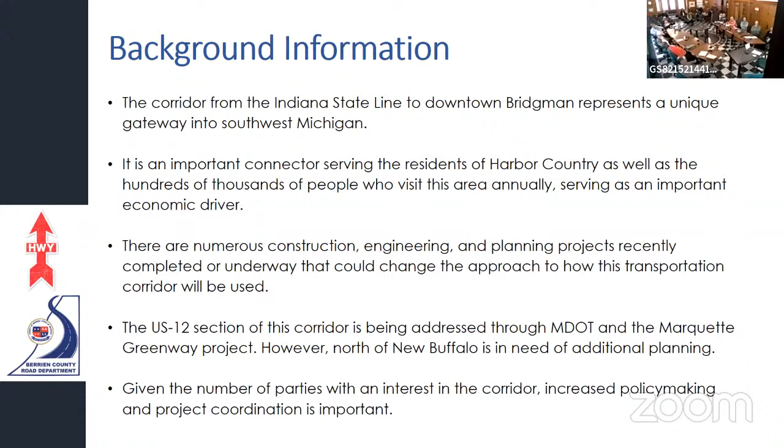This is a roll-up of the construction that has happened along this corridor since 2018. Ultimately, the takeaway is that 7.73 miles has been completed so far.

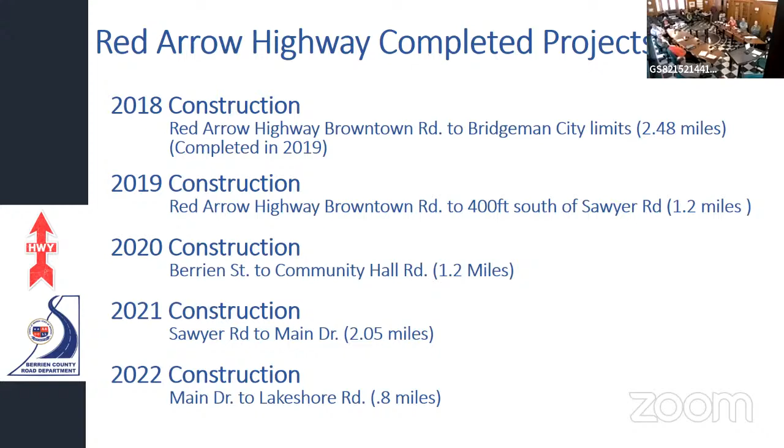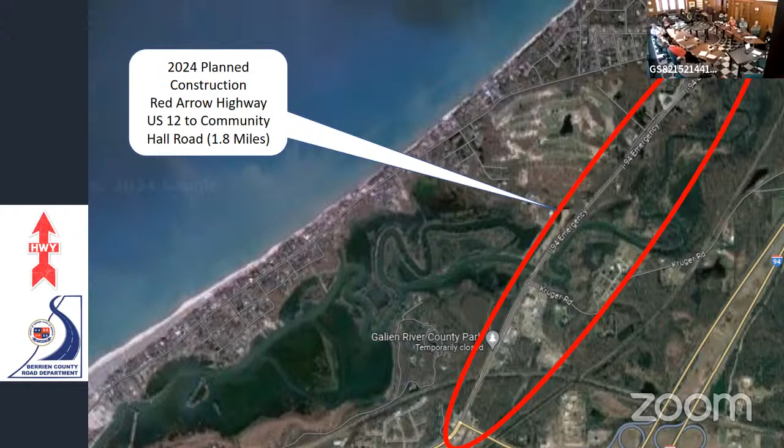Moving into this year's planned construction, US 12 to Community Hall is on the project list for this year, as well as Berrien Street to Lakeshore Road. However, we are still waiting for the approval of a TAP grant, which is linked to this project.

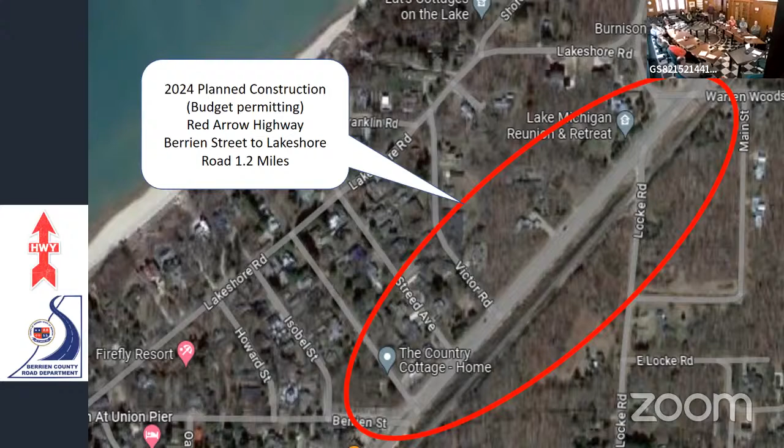Part of this construction provided us an opportunity. During the construction, the data showed us that it was appropriate to do lane configurations, reconfigurations on Red Arrow Highway. There are a number of safety benefits that come with conducting lane reconfigurations—otherwise the slang term is road diets.

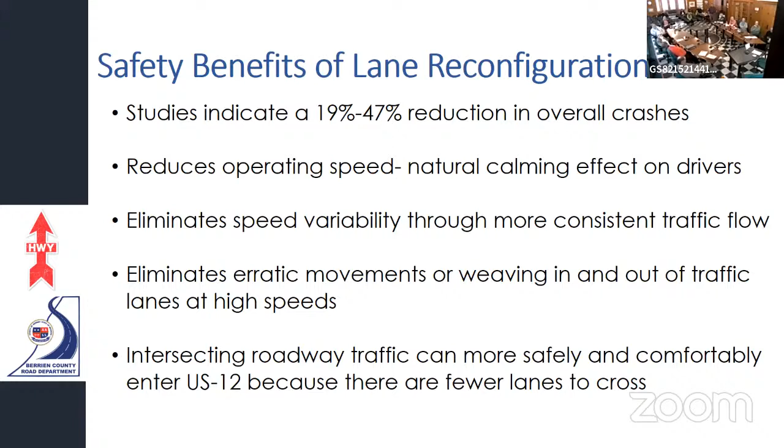Primarily they're naturally traffic calming. They provide motorists safer turning movements, and ultimately they reduce rear end collisions and sideswipe collisions for drivers.

This next slide will illustrate what I'm talking about with regard to conflict points. As you can see in the figure, there are 6 possible conflict points on a 4-lane undivided highway, described by the white circles. With a lane reconfiguration, or a 3-lane with a center turn lane, that reduces the number of conflict points in half, to 3.

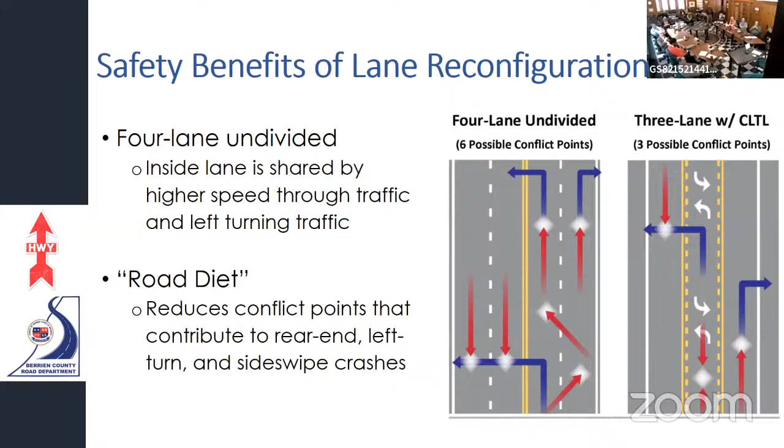In addition to reducing conflict points, it also improves safety by improving driver sight lines. As you can see in the illustration, when you have a 4-lane undivided highway, some cars in the inner lanes can mask or conceal cars traveling in the outer lane. Improving these sight lines greatly benefits safety.

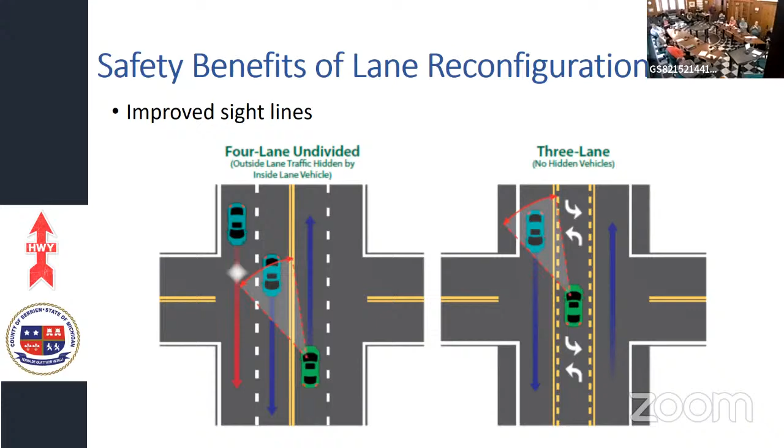Some of the concerns regarding lane configurations are about how much traffic a reduced number of lanes can handle. For example, between I-94 and Red Arrow Highway, currently there are 10 lanes of traffic, servicing approximately 75,000 cars per day. By comparison, using an example everyone's probably familiar with, the Dan Ryan in Chicago is comprised of 16 lanes and carries 300,000 cars per day.

So the Dan Ryan is comprised of 16 lanes and carries 300,000 cars per day. We have a lot less traffic, so ultimately the lane reconfiguration is able to handle our capacity.

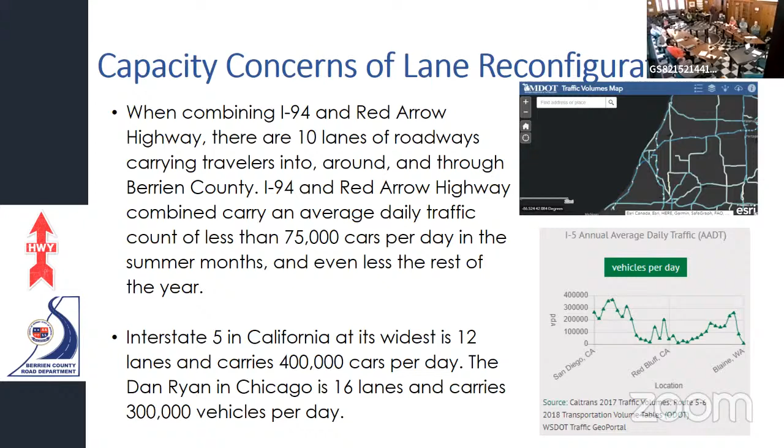In addition, there are times when I-94 has closures, but they're not as common as you may think. Total closures between 2015 and 2018, there were only 4. Closures that occurred with more than 1 lane are a little more prevalent, but those double closures still allow for the traffic to keep flowing.

With a bit more information on the closures and the reasons why: 11 of those closures were due to snowy and icy conditions. Only 2 of those closures happened in the summer, which is during our highest usage of the Red Arrow Highway, and at no time were both directions of the interstate closed at the same time. Ultimately, the average closure time was about 2 hours and 47 minutes.

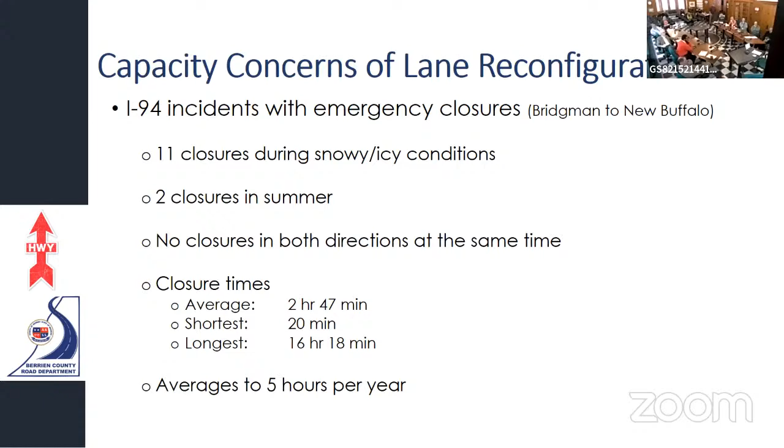So as you can see, they're not quite as prevalent as you may think. Lane reconfigurations also allowed for the implementation of a trail system. This trail system was discussed, talked about, and supported by two resolutions from the Board of Commissioners. I won't rattle off the numbers because I don't think anybody can refer to them other than by looking them up on the internet. Ultimately, the biggest piece of this is that people using the trail can feel safer and more comfortable with more space between fast moving traffic and themselves utilizing the trail.

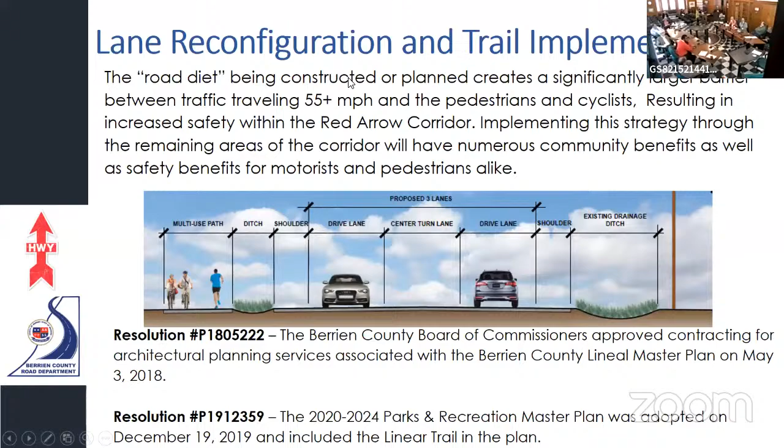And with that, I will transition to Marcy Hamilton, who will take you through a presentation on the trail, the linear park along Red Arrow. Actually, I'll let Annette do that. Thank you.

Did not bring yours up, so I'm going to do that. It was a PowerPoint, right? Yeah. Oh, right here, I think it's this one. This one. So Brian, while we're waiting for them to get up, if there's any questions, I see there's some here from the commissioners.

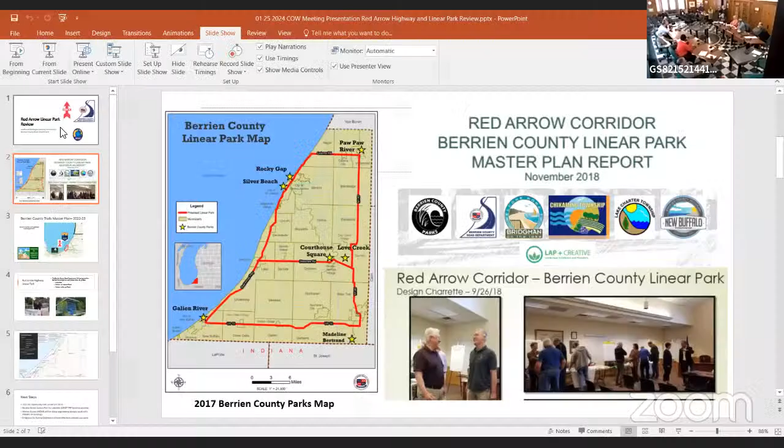The question was asked by Commissioner Yarborough. There was a temporary lane diet implemented in a partnership between New Buffalo Township and MDOT. MDOT implemented it just prior to the start of the summer season, and as a result there was very little communication and very little explanation of what was happening. New Buffalo Township requested that the temporary lane diet be removed. So that would have been, I think, the summer of 2020. Does that sound right? Yeah, yeah.

And it was up and running for a very short time. Thank you, dear. You're welcome. Sorry about that.

All right, so we thought we'd go ahead and give you a little update on the trail part of the Red Arrow project. This is the map from your county recreation plan that the resolution Mark mentioned adopted. This map and that plan is trying to connect all the county parks with a linear park system or pathway system.

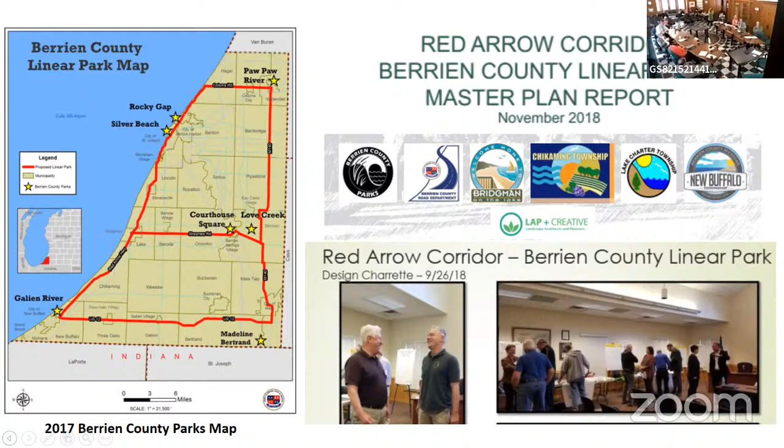A lot of this started way back in 2018, where the county hired LAP to do a study along Red Arrow Highway, the corridor, and the linear park. We got a lot of community feedback through that process, and the report given to the county supported what Mark talked about, the lane reconfiguration and the trail. There was a lot of support for that trail. It was a dangerous situation before that, with people walking on the road with very high speeds, people biking and walking on Red Arrow Highway, because it's a very popular spot.

So we've been working in tandem with the road department to implement the trail piece of the project by helping to write the grants to MDOT and to other funders like the Pokagon Fund, with the Friends of Berrien County Trails and the Southwest Michigan Planning Commission. We're doing all the grant writing for the trails. And obviously in the Berrien County Trails Master Plan, which we talked about last time, this whole project is supported in that, just recent plan.

As you can see, the red arrow, we call it kind of that red arrow gateway, because it is the gateway into Michigan. With the completion of the Marquette Greenway that'll connect us to Chicago, construction starts on that this March. And then going up north to South Haven, you connect to the Kal-Haven Trail, which is going right now all the way past Battle Creek. There's plans to take it all the way to Port Huron. It's called the Great Lake to Lake Trail.

And then there's work to bring that trail all the way up the coastline, all the way up to Traverse City. Right now it's US Bike Route 35. There are a lot of pieces of that trail in place up in South Haven, Holland, and Saugatuck, and on up the coastline—several segments of this trail completed. So we really are in a special place here in Berrien County, being the gateway to Michigan for this system. It's pretty exciting.

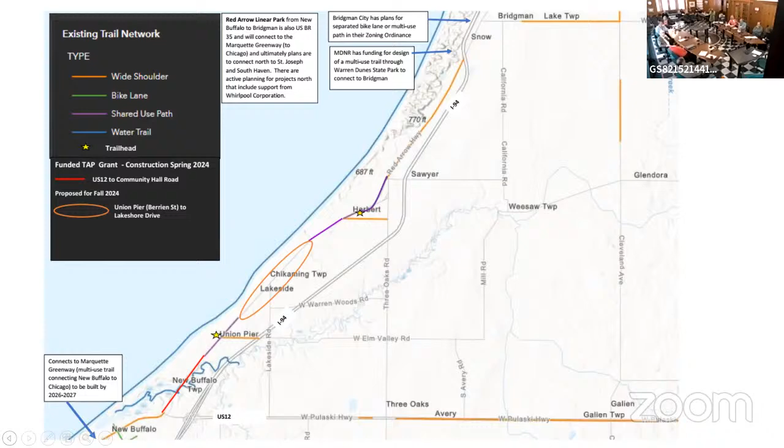And Bridgman is talking about extending that trail through town. It's in their plans locally too. So yeah, I pretty much talked about that. That's what's happening next. I think that's all we have for you guys on the Red Arrow piece, if there's any questions.

Are there any other questions for Marcy, or any that you thought of for Mark?

Lake Township and Bridgman's plan is to run the bike trail through the state park, not along the highway side, all the way into Bridgman—well, not all the way into Bridgman. It'll only be from where the state park starts, at Browntown Road.

And that's where it'll go off into the state park, up to Floral Lane—that's the farthest we can get on state land. Past that, there's no way to get on state land into the city, so we need to come back out onto Red Arrow Highway at that point.

So I know Lake Township doesn't favor the 4 lanes to 3. I know Bridgman does. So is that already in the plans, that Bridgman is going to 3 lanes? I mean, how is that going to work? You're gonna go from 4 to 3 and then out again?

So as we come up out of Sawyer, right now we're in Sawyer with 3 lanes. The Sawyer intersection remains the same for capacity reasons at that signal, unless we get funding to do a roundabout. But without that, that won't happen—so that will stay the same.

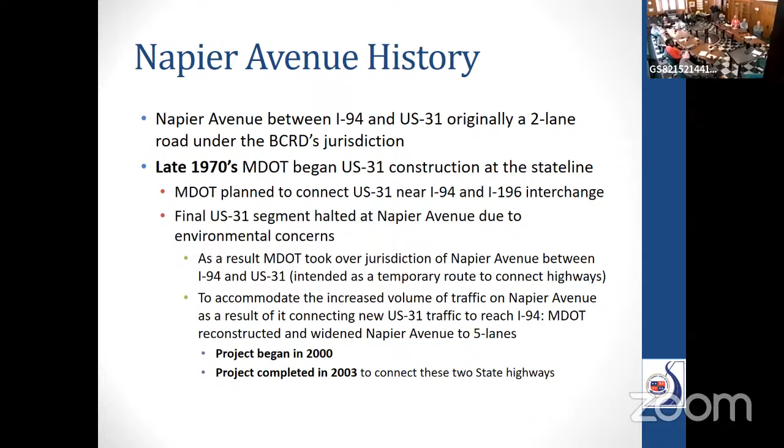Fall of 2020, MDOT began construction of US 31 to connect to I-94. The project was completed in 2022. The temporary route of Napier Avenue connecting US 31 and I-94 was no longer necessary to be under state jurisdiction. In November 2023, MDOT went through the proper process to transfer jurisdiction back to the road department. Due to the traffic pattern and volume change of Napier Avenue, a traffic study was requested by the road department to use for properly designing Napier Avenue for all users.

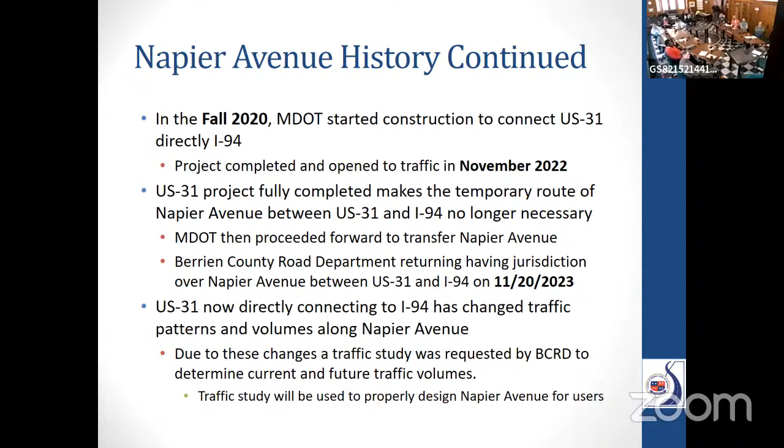Just an overview of the area we're talking about again, from I-94 to the US 31 bypass. Like I said before, it goes to Blue Creek on the east end and Crystal Avenue on the west end. This will be the last section of Napier to be constructed and redone, from basically the river all the way out to the county line.

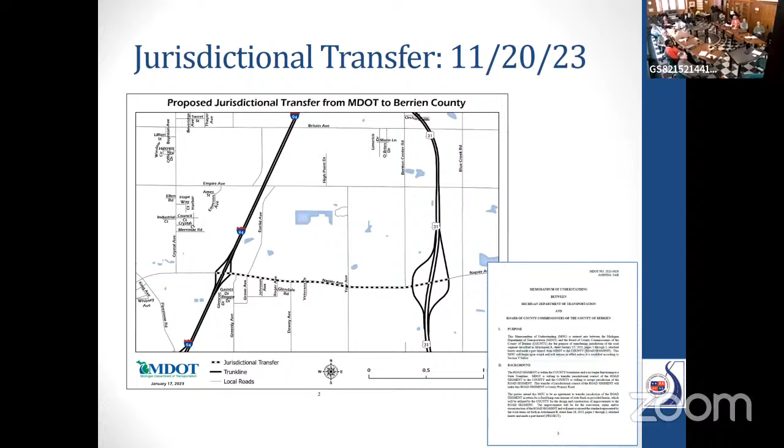Yes, ma'am. Crystal Avenue is all the way to your left of I-94. I don't know if I have the... Okay, yep, so it's all the way to your left on that screen.

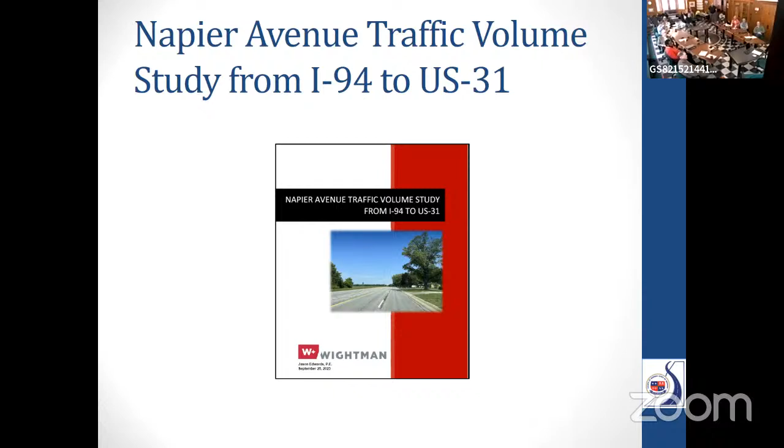This is just a traffic study cover that was performed by Wightman back in September, early October, using traffic data that we collected during the summer. That's just a screenshot of what it looks like.

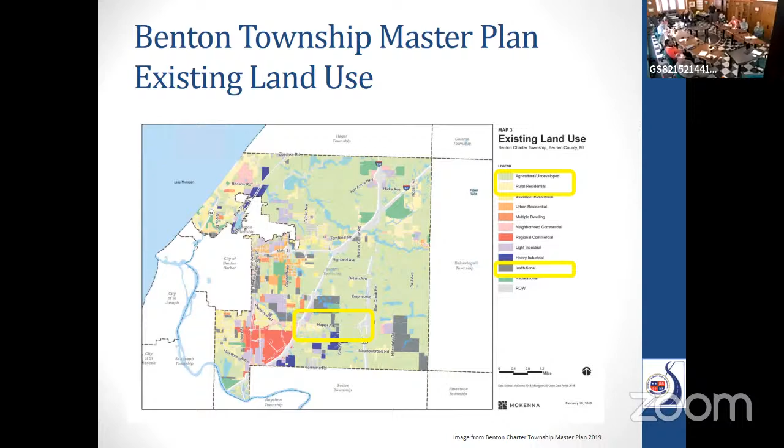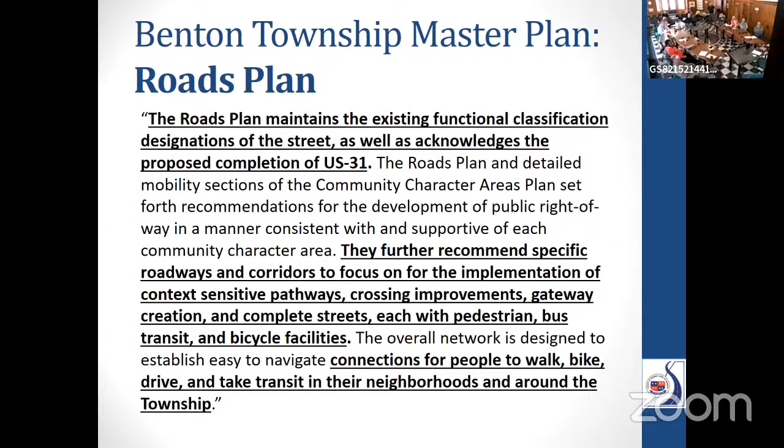The next slide brings it down into further discussion of mobility and public feedback, which emphasizes support for rural complete streets, non-motorized connections, and leaving land vacant for agricultural uses. Within their master plan, they have a specific section on road plans. Even though this plan came out in 2019, the road plan portion acknowledged anticipation of completion of US 31. The overall network is designed to help people walk, bike, drive, and take transit in their neighborhoods and around the township. This is pulled directly from their master plan available online.

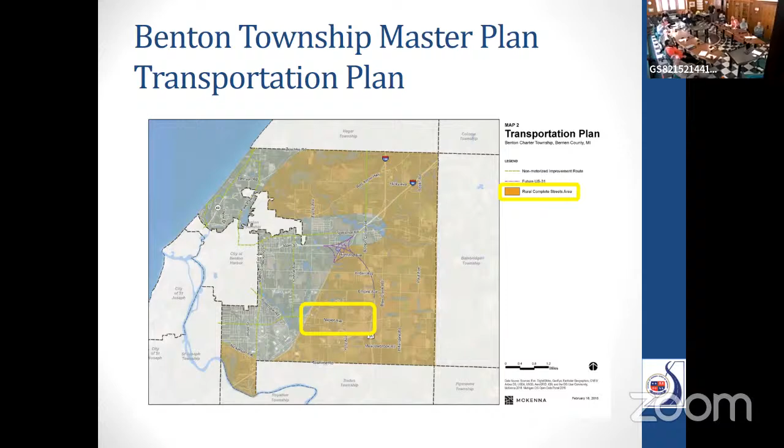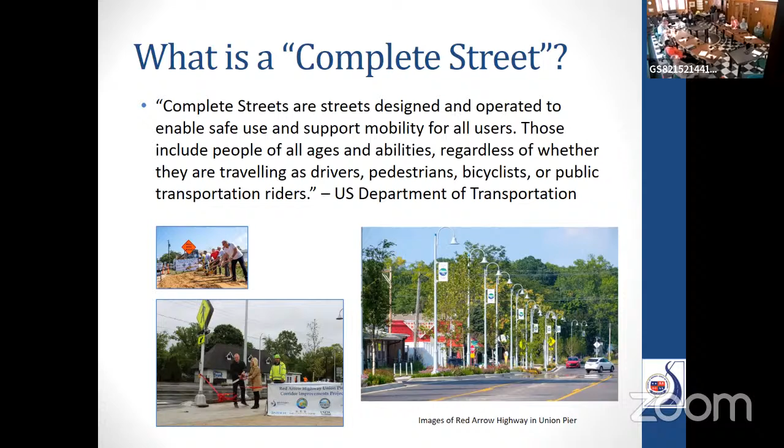This is another highlighted area. Again, our corridor is in the highlighted yellow. This defines this area as a rural complete street. What is a rural complete street? Examples are Union Pier and Red Arrow. That is a massive complete street, we call it. Your pedestrians, your motorized vehicles, your bikes, everything can use it. That's what we cite as a complete street. The U.S. Department of Transportation cites complete streets as streets designed and operated to enable safe use and support mobility for all users, including people of all ages and abilities, regardless of whether they are traveling as drivers, pedestrians, bicyclists, or public transit riders. That's a quick definition of what a complete street actually is.

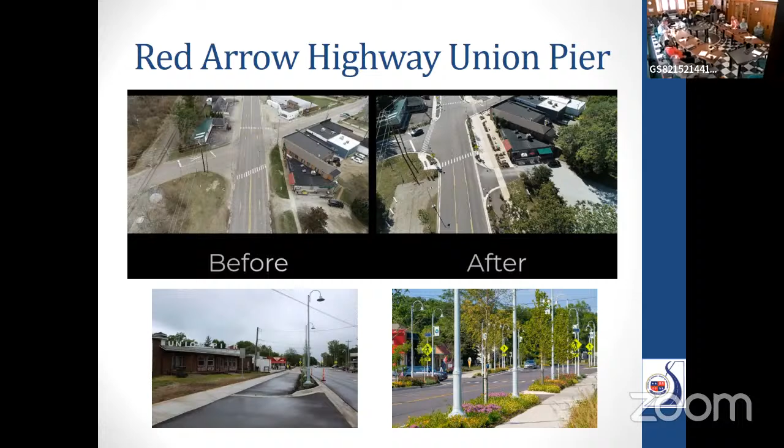This is a picture of Red Arrow Highway in Union Pier, showing on the left the before: 4 lanes with very minimal non-motorized features. On the right, the after: the same picture showing the large sidewalk and the non-motorized trail. The bottom shows some ideal pictures of what it actually looks like down there.

Yes, ma'am. So we performed a study on that this year. We are seeing an 80% reduction in rear end crashes, so a significant increase in safety there. We're seeing about a 67% decrease in pedestrian versus car, which is astronomical. The only thing that was a little interesting to us, we saw a slight, probably 4% increase in sideswipe. The only thing we can relate that to is those incidents are coming from Miami and Napier, and Colfax and Napier, where they're rushing to get in. So that was something we looked at as far as queue lengths when going into our design, how long we're giving them to transition over. That's something we're taking into consideration as we move into more road diets, as far as, all right, we've learned from our first one, the busiest section, how can we implement to be better?

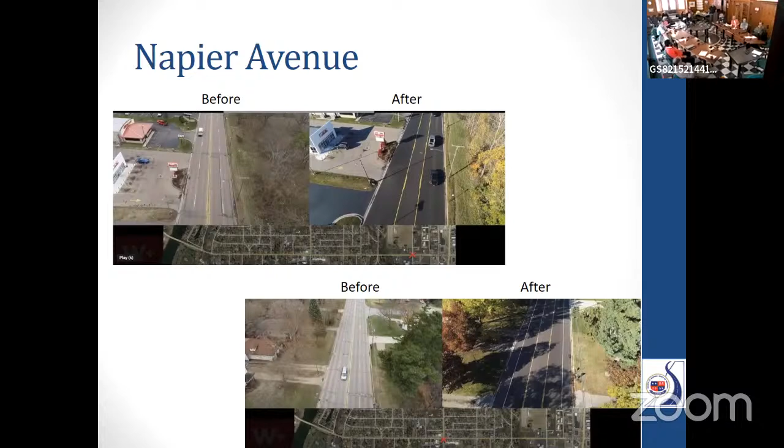You saw the sidewalk project happen in St. Joe this year. St. Joe took ownership of that sidewalk, and they're doing a phenomenal job clearing it. It's helped even more. We are having that issue of people wanting to put landscaping out between the sidewalk and the road. We have a very tight right of way there, we only own probably about 3 feet behind that curb. So it's kind of a back and forth game, but luckily that curb and gutter is there to allow us more flexibility in what we allow. Also we see people on the sidewalks using that extra width for whatever was intended, or parking there. So that's what we've watched. We have taken care of that several times now. The township has put that in place. I think we're seeing less and less of it.

So, right, you've got 2 different designs there. Obviously, the red arrow is designed to handle increased traffic, we're going to keep going, so it's not a long, drawn-out situation because we know in the future we're going to increase it. Napier is kind of stuck in there.

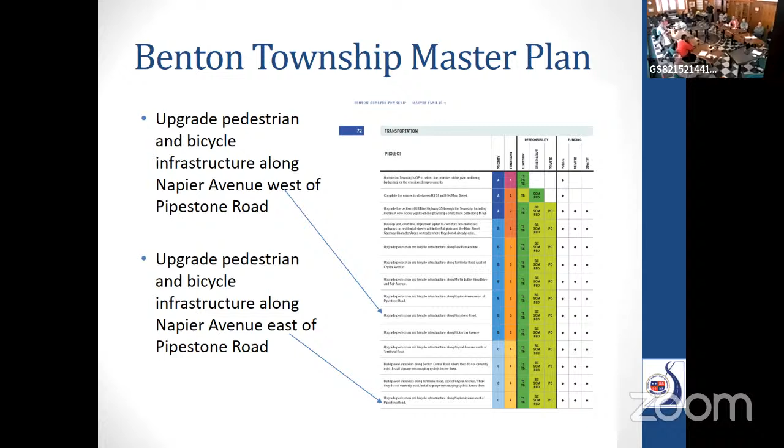Next, we're going to go through these conceptual drawings of Napier really quick. This is based on survey and design, then we make it artsy so the public can understand and see exactly what we're doing, but it is based off actual design. So we'll take just a little bit.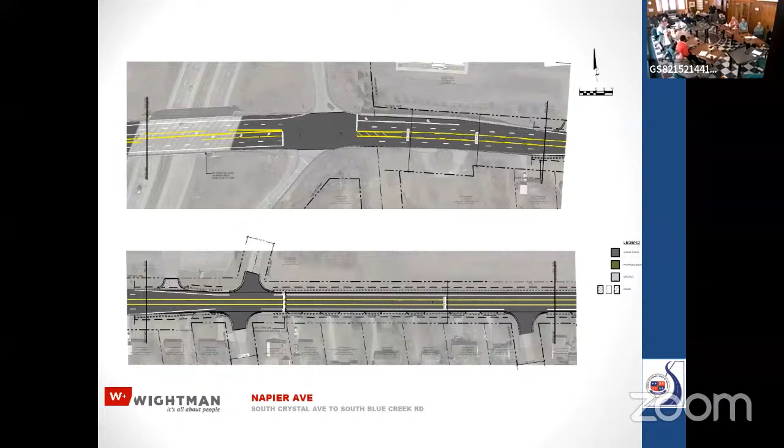Keep moving east, we get to the east side of I-94 as you approach the health department at the top—you're still looking at the same configuration. Now as you move to the bottom, you can see as we approach Euclid and the entrance to the health department is where the transition starts. This is transitioning down to two 11-foot lanes, one lane in each direction, with a center turn lane that's 12 feet wide. Each shoulder outside of that white line is 6 feet, each one. So this allows plenty of room for any type of pedestrian.

Now the difference here is what we are trying our hardest to achieve is removing the existing curb and gutter. There's existing curb and gutter out there now with drainage structures to handle all the water flow. There are water flow issues out there with the county drain, low spots in front of the old VFW that hold water on Napier, and we are trying to get rid of that.

So our plan, and right now it's working in our favor, we're still doing some analysis on it, is we'll be removing that curb and gutter, changing the structure types to more of a ditch-yard drain, and we'll put a swale down each side of Napier. Not a huge ditch, just a swale, probably 2 feet deep, nice and mowable, with 1-on-3 grade slopes to allow that water to flow to those structures still, but it's going to allow us to use the ground to infiltrate water a lot more than we can right now.

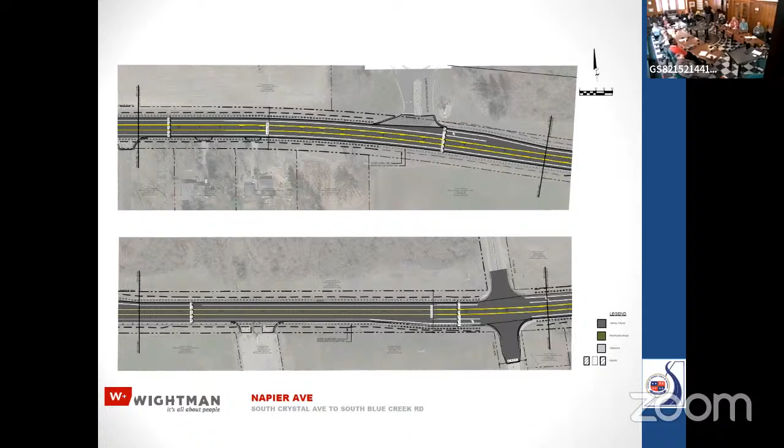Currently what's out there is a deceleration lane when you're headed westbound and trying to turn right into the college. It's only a deceleration lane, so we have several sideswipe and rear-end accidents listed there. What we're doing is introducing a protected right-hand turn lane. This will allow a car to move out of the traveled roadway and slow down once it's in it, with a queue big enough to handle any event Mendel Center may have and easily handle that traffic load. Along with that is still the continued protected left turn lane for the entire duration.

As you move to the bottom picture, now we're approaching Yore Avenue. This is the biggest intersection we've been monitoring besides Benton Center, and it has the most commercial traffic. With our facility on the south end, we have High Grade, Consumers, Kalen, a lot of semis moving in and out of here.

A big feature there is both directions have protected right turns. You can see at the top, turning north onto Yore, and one on the south, turning south onto Yore. Again, there's the protected left turn lane through there. This will help semis get out and across rather than crossing five lanes of traffic. Now they are only crossing three to go westbound, which is their main movement to get to I-94.

So this is one of our critical features. Right now our guys will tell you they're extremely happy they can get in and out of that intersection a lot easier than they could a year ago due to traffic reduction. It has already improved safety tremendously out there, and we're just trying to make it even more.

Moving further east, now we're moving towards the bypass, back down to three lanes, standard design all the way through until we get to Benton Center. There's Benton Center.

The east side will look familiar, basically staying how it is. The west side is what changes a little bit. Again, we have that protected right into Benton Center South, which is basically an MDOT parking lot. We are going to reconstruct the intersection here on the south side.

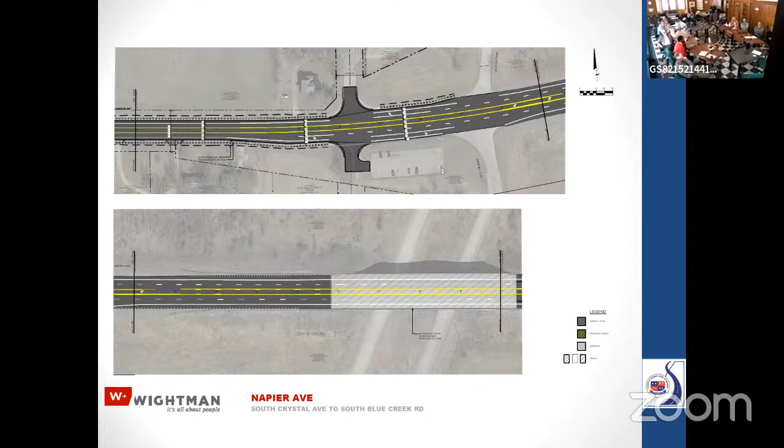As you move towards the bypass bridge, you can see the grayed out bridge deck — that all stays the same. Like I said, that bridge deck stays MDOT jurisdiction. We don't take any of that. They can.

As we move towards the east side of the bypass, same thing — we get to the light at the bypass entrance and exit, that will remain MDOT's. There's actually talk that might go away, just because it may not be needed anymore. After that, you'll see us transition down to two lanes after Blue Creek to meet the existing Napier Avenue.

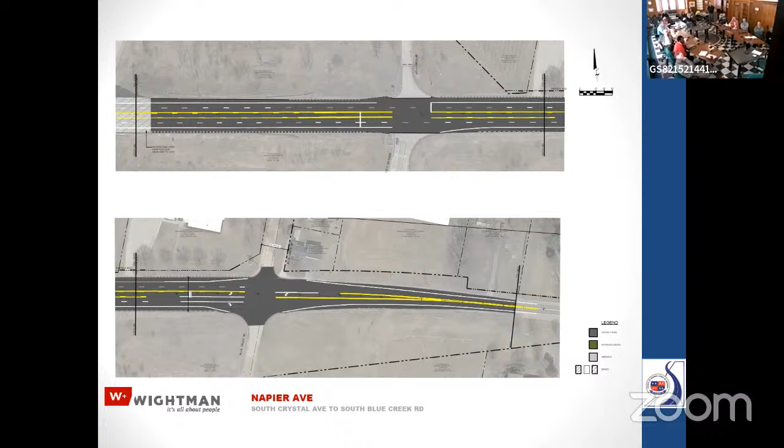These next ones are just quick zoom-ins of the intersections. You guys should get a copy of this so you can actually look at them. It just shows the radiuses of each one, gives a zoomed-in picture of each intersection, LMC there on the bottom, showing that protected right.

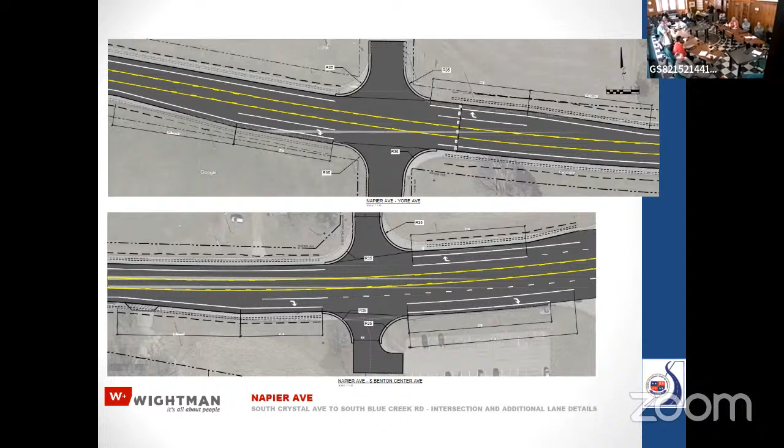Then here's Benton Center and Yore, just showing those two different big intersections zoomed in. Then moving down towards Euclid and the health department — there's the health department on the north side, their entrance, and then Euclid right off to the right of the screen.

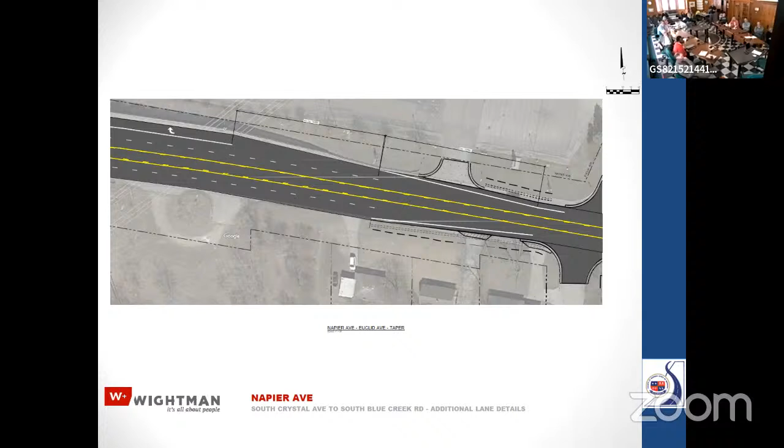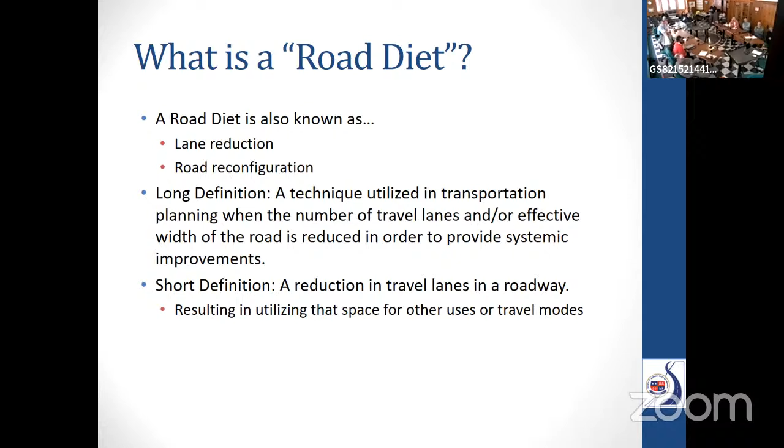So obviously we went through the road diet, everyone knows that, so I'm not gonna go through this. You have a pretty good idea of what we're talking about, lane reduction, road reconfiguration.

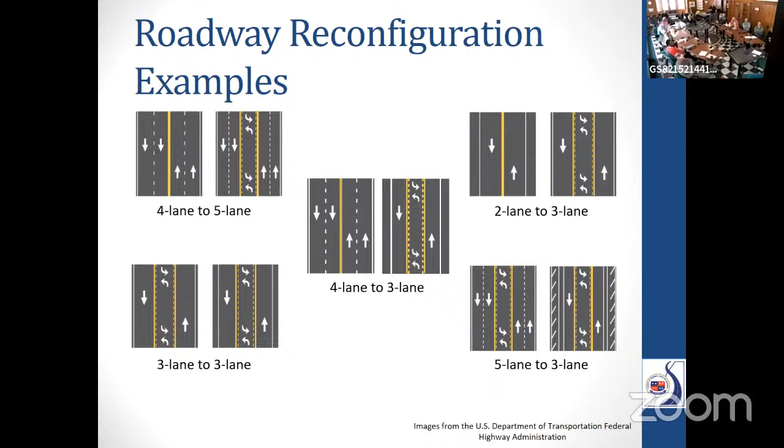And then just again, a classic 4 to 3 lane conversion. You guys have seen this multiple times. This is Red Arrow, what we're trying to achieve here.

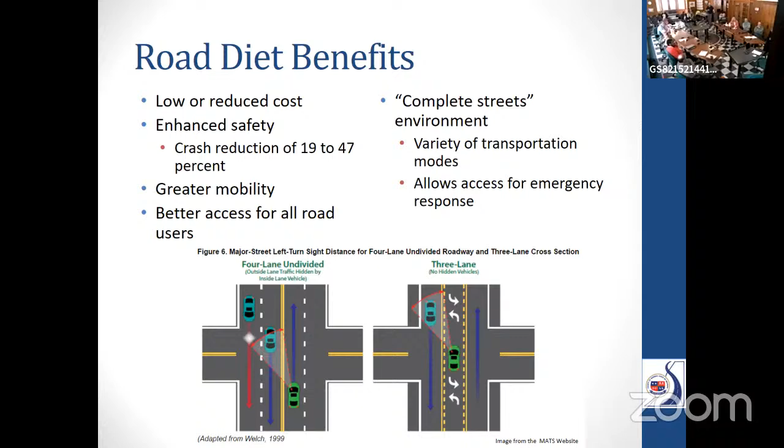And then like Mark talked about the benefits of it, we've got lower reduced cost of maintenance, enhanced safety, greater mobility, better access, complete streets element, and a variety of transportation modes. The one thing I always hit on, just because of my background, is it allows access for emergency vehicle response. That's the benefit of a center turn lane. That truck gets in that turn lane, the ambulance gets in there and it goes. No one's gonna be in there. You're visible from both sides at the same direction, same amount of time. So it helps with that response.

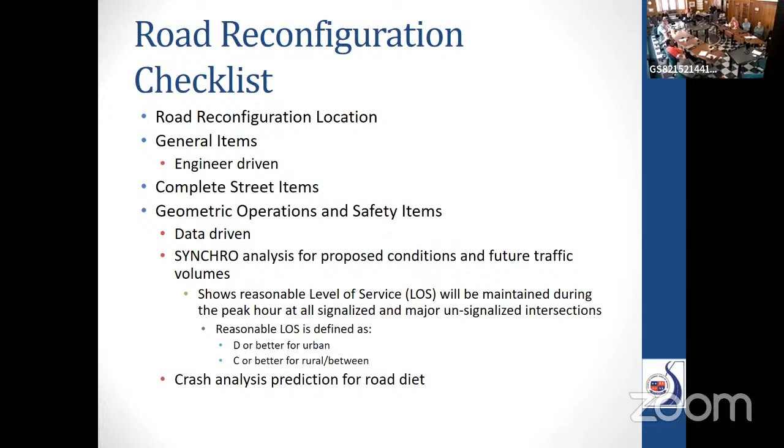And then just our checklist we go through: road reconfiguration location, general items, complete streets, geometric operation, safety, crash analysis prediction.

Before we get into questions, I do just want to say that I am the data guy. I get the data, I get the pictures and everything. I then give it to Adria, our communications coordinator, and she's the formatter. So she's the one that put all that into that nice, pretty slideshow. I'll give kudos to her for putting that all together. But I just do the data.